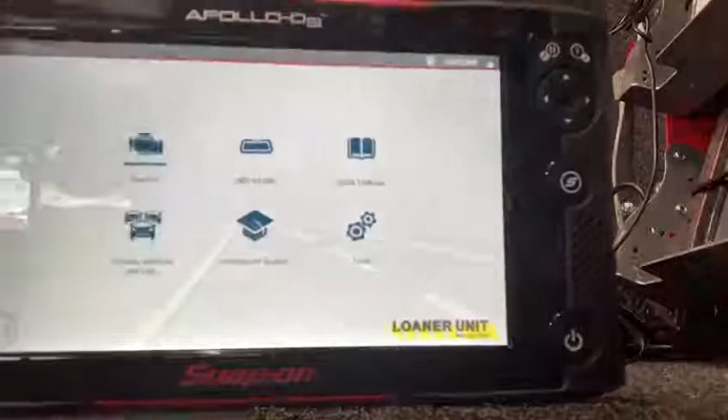So we're going to start off by powering it up. First of all, extremely quick startup time. This thing boots up quicker than you can probably open the door and find the OBD2 port.

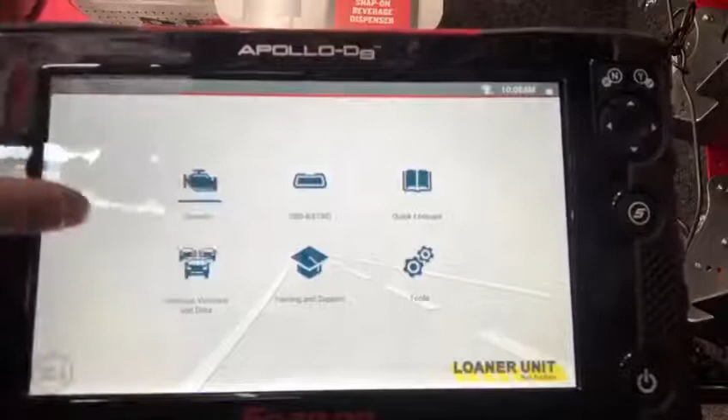So you get 6 options on this one. You have your quick lookups, your OBD2 direct - so this is basically like your generic code reader - your bidirectional scan tool over here, and then all your back end stuff. So you get your previously viewed data, previous vehicles, training and support, which is really nice.

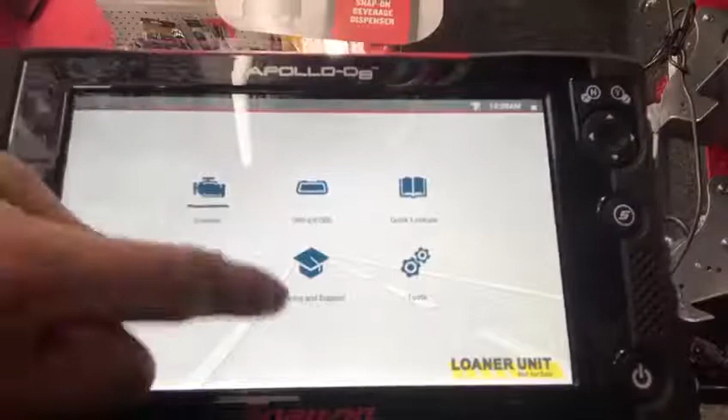There's actually videos built into this one, so if you have any issues you can refer to it. It's almost like an online training manual as is.

And then your tools. What I'm going to be going through is just your scan tool application on this, mainly because we could be here hours. But this scan tool is very...

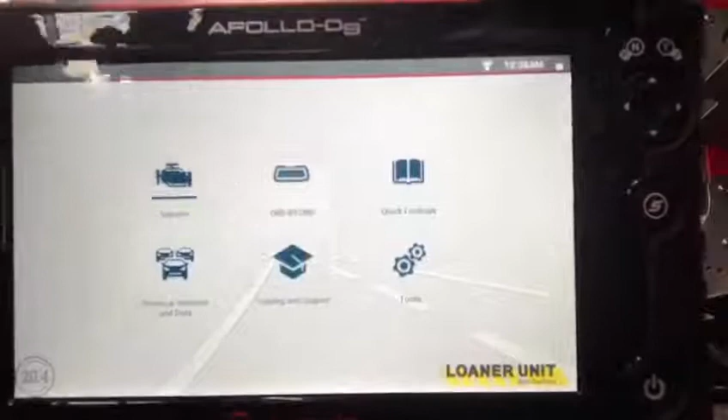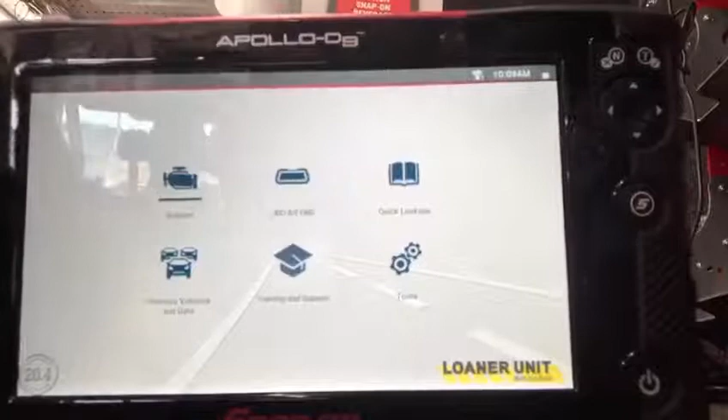I'd say unique, because not only is it a bidirectional scan tool, which means you can basically actuate almost everything on the vehicle, from turning the headlights on to putting the windows up to actuating the wipers, basically everything. But it also has something called Intelligent Diagnostics in it, which is a filtering program that only Snap-on has. It's a very unique thing, and we'll get into that right now.

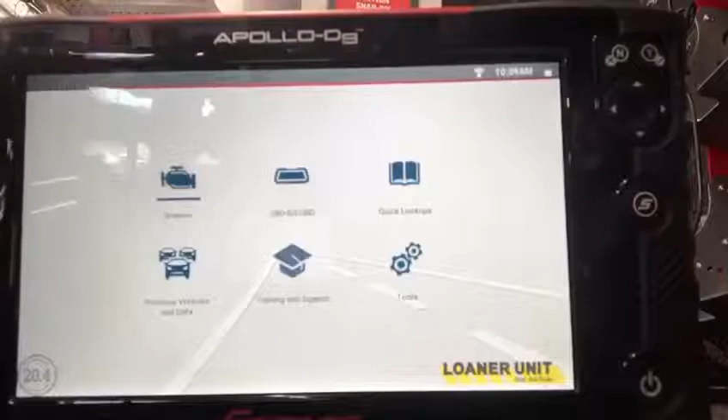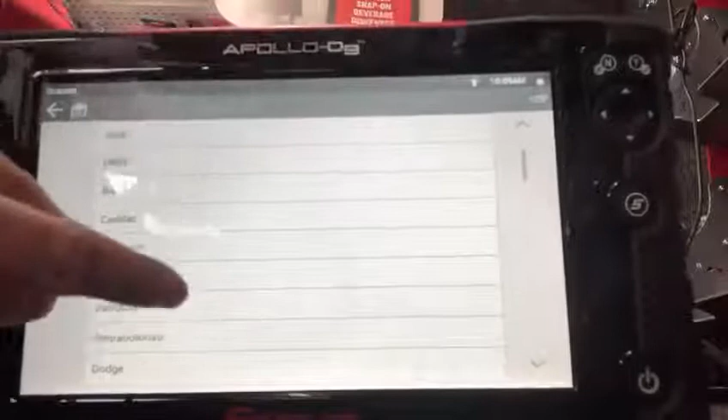So we hit scan tool. For one, you'll notice how quick it is. Now about this new screen - our old scan tools were pressure sensitive, so it couldn't tell if you were swiping or touching. The new ones, you can actually swipe with it, so you don't have to worry about using your directional pads like you would on an older scan tool, or tapping at the bottom here.

It'll basically allow you to swipe as if it's your cell phone screen. So we're going to go into demonstration here, and basically that means it's acting as if it's already hooked up to a vehicle. I'm on the truck, unfortunately my smart car wouldn't fit on the back, so we can't plug into that today. But if you do want a real world demo, let me know and I'll show up on time for you.

So I'm just going to go into a Chevy, because obviously there's a few more Chevys around than BMWs. Toyotas as well.

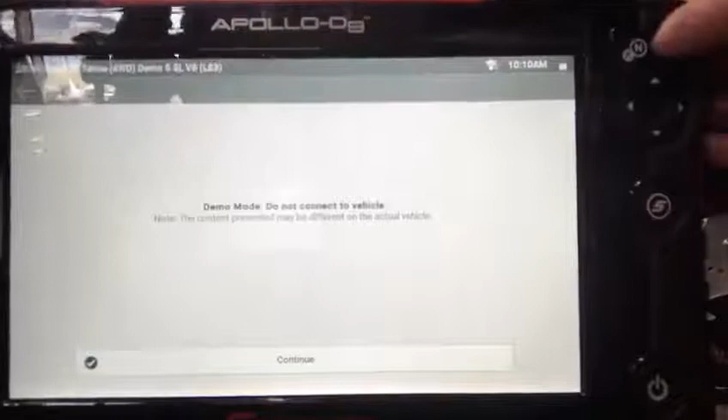So Chevy, we're going to click on there. We're going into a 2016 Tahoe. You'll notice how quick this is as well - this is real-time stuff, so it's not because it's preloaded in or anything, this is how quick it actually works. And also over here, you can just hit your yes button. So we're going to do a code scan.

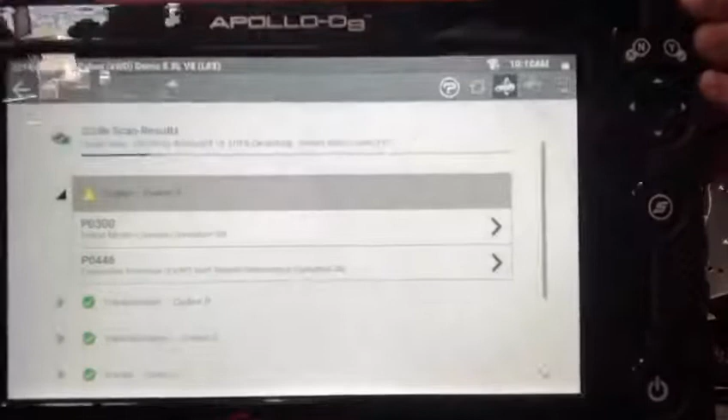We're going to start this from the bottom, so we're going to do a pre-scan as if the vehicle's just coming in. You'll see that little line cruising along there. Keep in mind I'm stalling right now, but there should be about 25 modules in this vehicle that it's actually scanning individually.

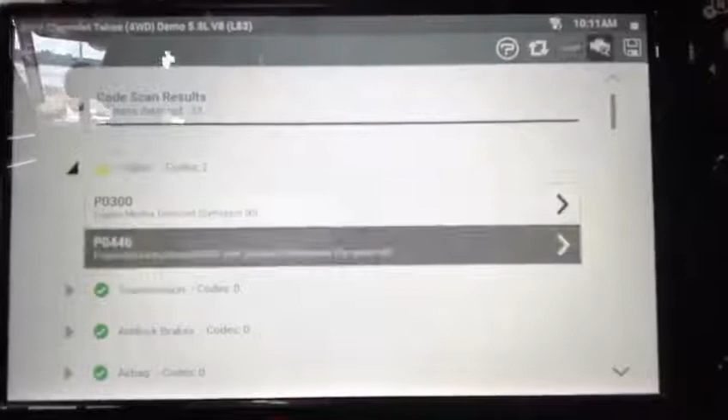And just like that, it's done. Since this is a demo, it's going to give us some information as we go. On this virtual vehicle, you have two different codes: a P0300 and a P0446. Now, if you want more information, this is where this scan tool changes.

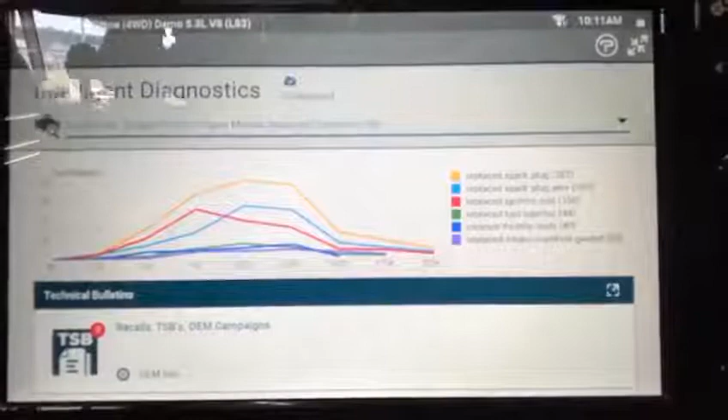So this is your Intelligent Diagnostics page. It gives you your most commonly replaced parts. Obviously you're going to probably look at your yellow line first, where it has more repairs than any other one.

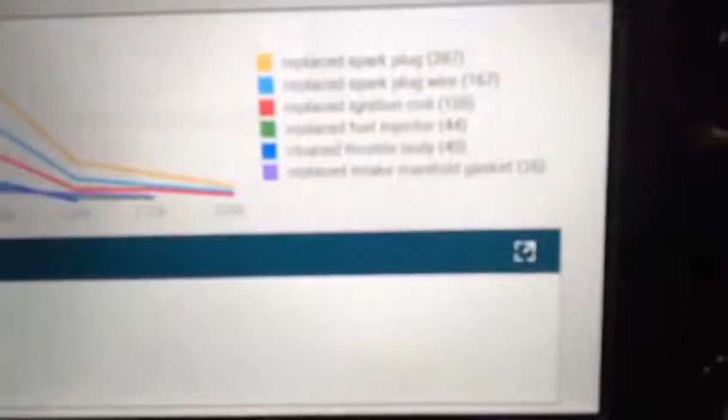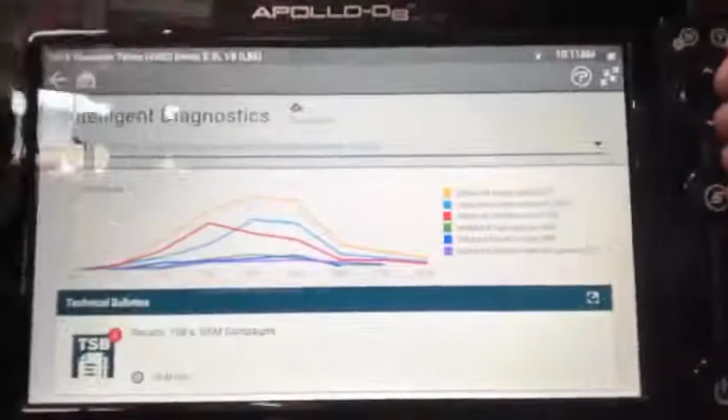If I focus in here, you'll see that says replace spark plug. Obviously on a misfire code, that's where you go first. Now, it could be coil, coil on another vehicle, it could be something completely different. Each one is specific to the vehicle, to the code, so it's not going to have a generic thing where it says on all misfire codes it's going to be the spark plug first. But it's a fairly generic issue, and usually the spark plug is that issue.

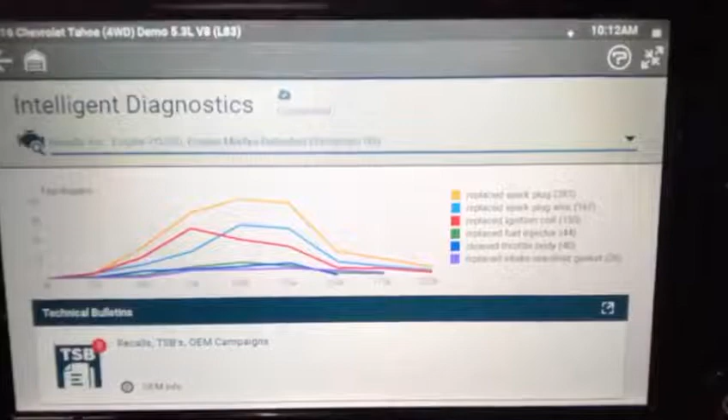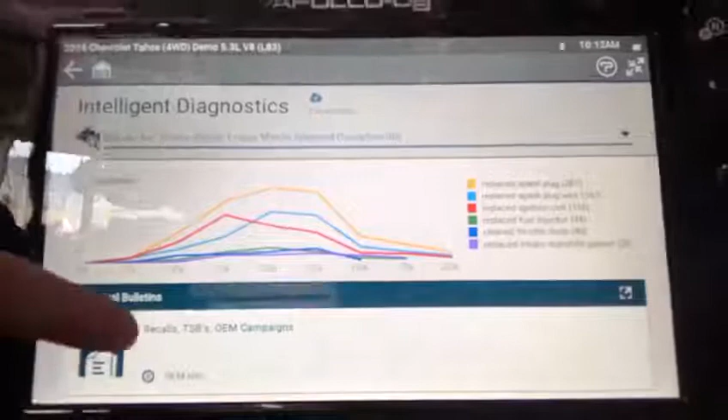Now, you probably noticed down below here, you actually have a TSB button. So this is up to date. Obviously, if you were behind on your updates, you wouldn't get the same information or at all. But fully up to date, you get any known TSBs for that vehicle on that code.

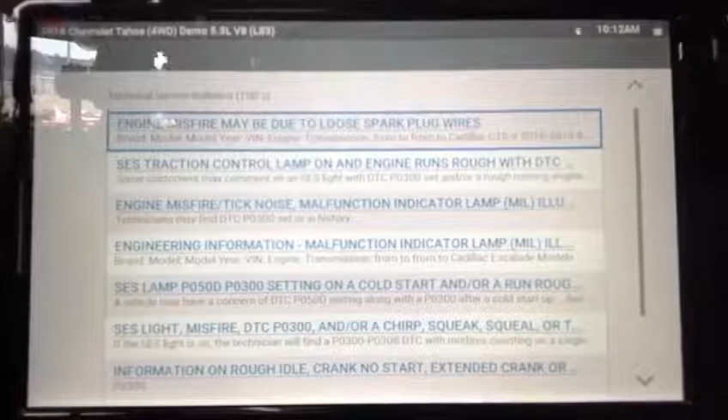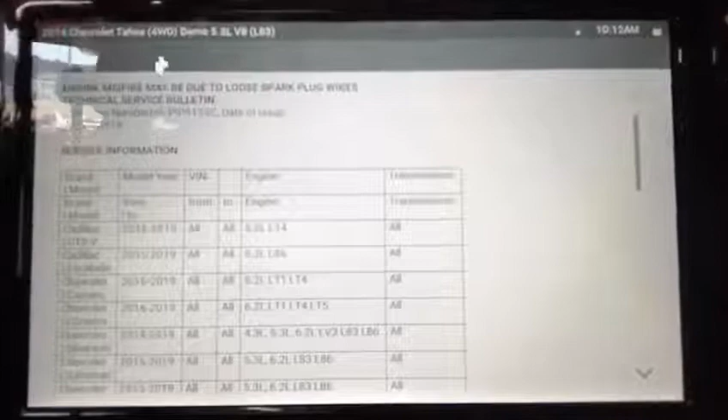So right then and there, you could stop working on the vehicle. You might be good and say, hey, this can go to the dealer. This is something that I can put on the back burner and let someone else deal with, or something that you might want to get on top of right away if parts are on back order. But to know if those parts are on back order, you're going to need to know what parts need to be replaced.

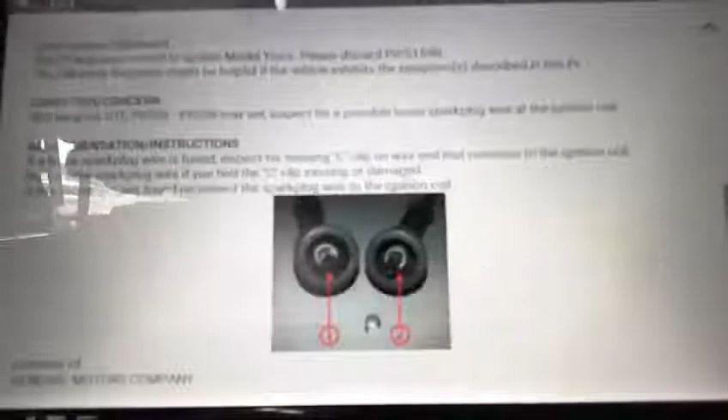And with this TSB information, we'll go down through obviously pictures, as if you're looking at a computer screen. It actually shows you everything you need. So this one's a fairly short TSB, it tells you all your makes and models that are related, so on and so forth.

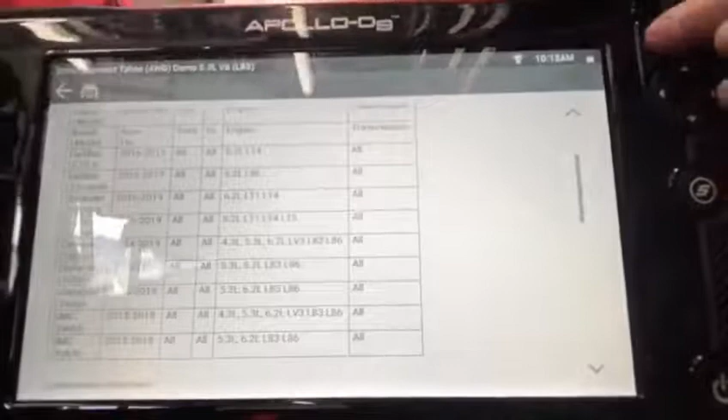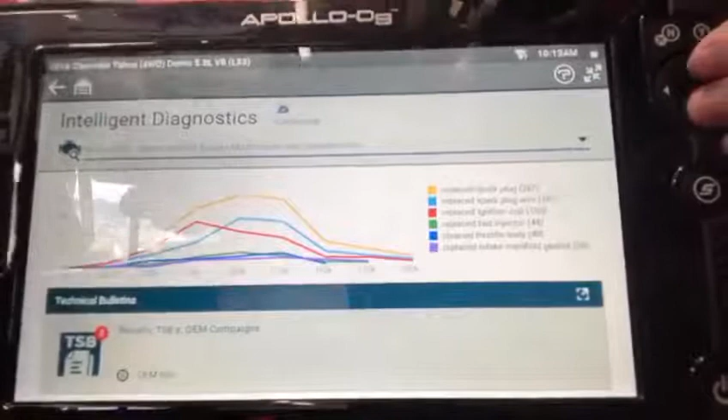Once you're done that, you can hit your home button or just your back button up here, and then you can look at any of the other TSBs that may be related to the issue you're having. We go all the way back to your landing screen, and as you notice, it was only 2 clicks. You're right back to where you started with that Intelligent Diagnostics landing screen. You'll see this a lot if you are scanning vehicles.

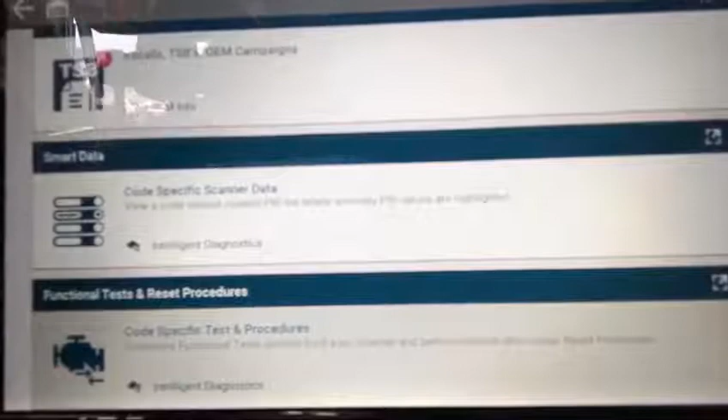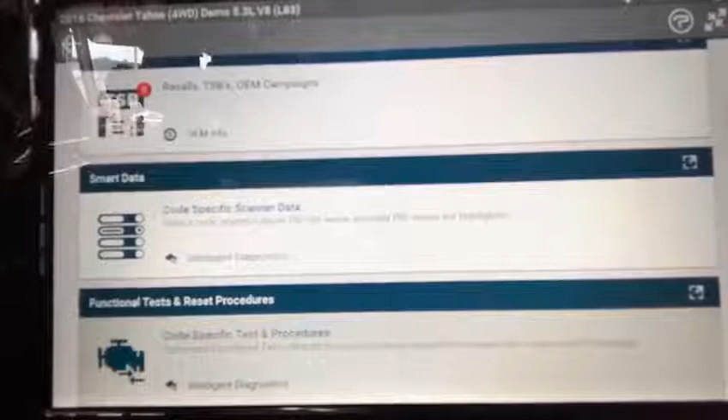Now, below that TSB, you're going to see Smart Data. My favorite part, because as you can tell by my videos, sometimes not the most professional. I have not scanned a lot of vehicles in my day, but I can tell you that this has saved a lot of people time, because on a vehicle, on a P0300 code, a lot of people know exactly what data you're going to want to look at. But if that code is more obscure, or if that code is something you think you know the answer to, but you're not sure...

So you want to check data on it, live data on the vehicle, you're going to have to go through and actually select each individual PID list or your individual data that you want to look at. This scan tool filters it for you, and not only does it filter it for you, you'll hear it in a second. It takes a second - headphone warning.

Don't worry if it is going to do it, you're going to want to turn your volume down. You'll hear the beep right there on time. So what that beep tells you is there's some data, one of these PIDs - and obviously we know which one it is - is out of manufacturer's specification. And what that means is there's an issue with the min or max values that the vehicle is outputting compared to what it should be doing and what the scan tool is reading.

So you'll see there's a little red flag telling you which problem child you have to deal with and which information you're having issue with. So obviously you see it counting up over here - that's the amount of misfires on that cylinder.

Now you could have 2 or 3 cylinders misfiring, but right now you're only having cylinder 2 misfiring. So it gives you a place to start.

Obviously, if you have one of our Snap-on scan tools, you can get into this same information, but with this one, it actually does it a lot quicker. It's already filtered for you, so you don't have to sift through hundreds of different PIDs just to get to that information. Now, let's say you want to see all that other information, you hit your no button once, and you're back to your Smart Data list that we were just in.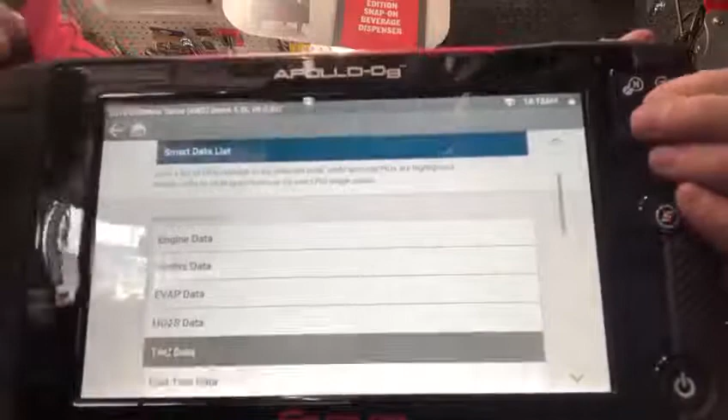But you can also go into engine data, your misfire data, or anything else that they've made custom PID lists for, or all your data at once, whatever you want to look at. We go back one more time, back to that familiar page.

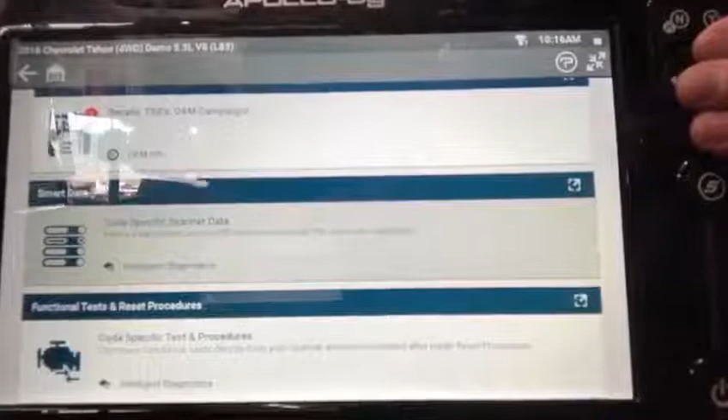Last thing, I promise you, I won't keep you here all day. I've already spent 10 minutes of your time. Hopefully it's been worth it so far.

But last but not least, your functional tests and reset procedures. This last thing, I'm going to show you my face on this one because I want you to know I'm being truthful. I don't want you guys to buy these scan tools as a code reader. These things do so much more, and like I was saying before about bidirectional controls, these things will do so much more than just read and clear codes. This is where you'll actually be able to see that. This is where the rubber meets the road. So we're talking about that misfire code.

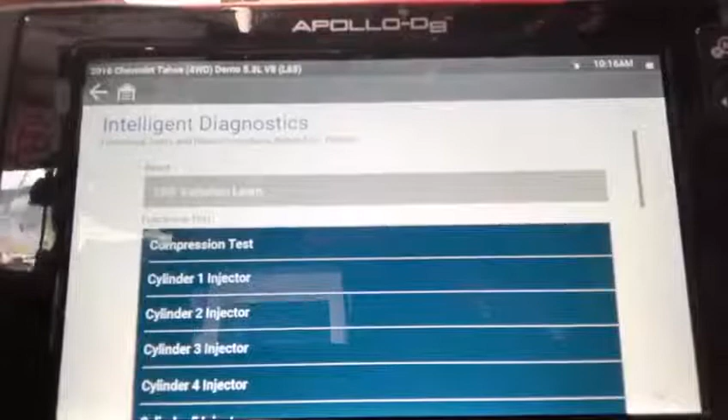You want to know what functional tests and reset procedures you can actually do to diagnose that vehicle further. On every other scan tool, you'd have to go back to your engine menu and pick whichever functional test you wanted. It's just generic. It doesn't lead you in any direction, it doesn't tell you what the recommended tests would be. This one does.

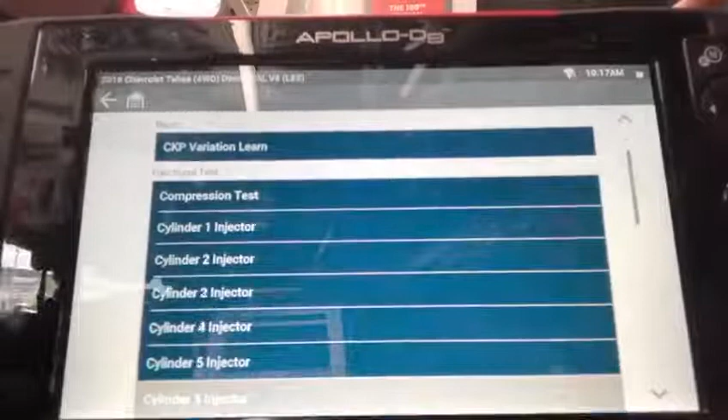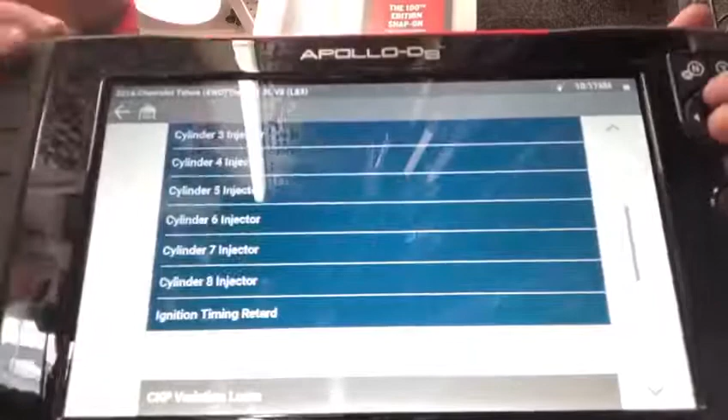So you'll notice you've got your different compression tests and then your injector actuations, I guess we'll call it. What you're actually doing is shutting down your injector to make sure the injector isn't the issue, or making sure that it is the issue, along with your ignition timing test as well. They're all in there. And of course, any other tests you might want to do, but they're not related, or at least not known to be related to that code that you have.

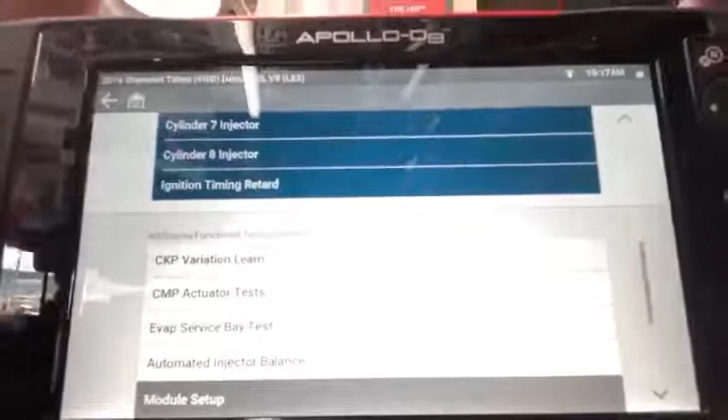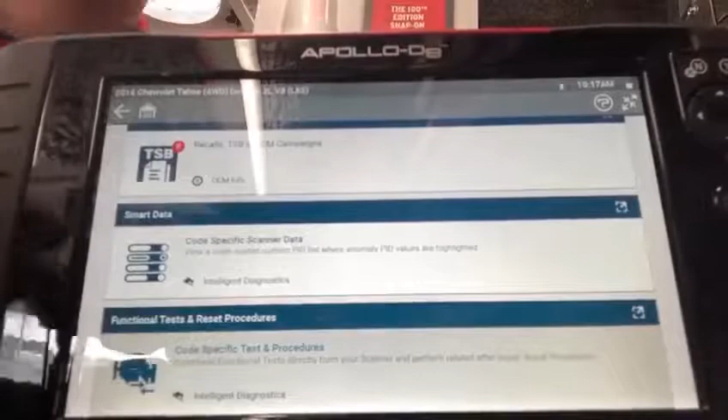So it's a filtering process that saves you a lot of time. It helps you find things that otherwise you might not know are in the scan tool. And of course, the best thing is if you have a vehicle you've never dealt with before, you can actually diagnose it as if you've worked on it 100 times before, because these tools have worked on it and keep that data inside of it.

Last thing, it also gives you your SureTrack data, most commonly replaced parts, causes, corrections, and complaints. So if you have a complaint that doesn't have a code, something along those lines, you might be able to get some information out of it that way as well.

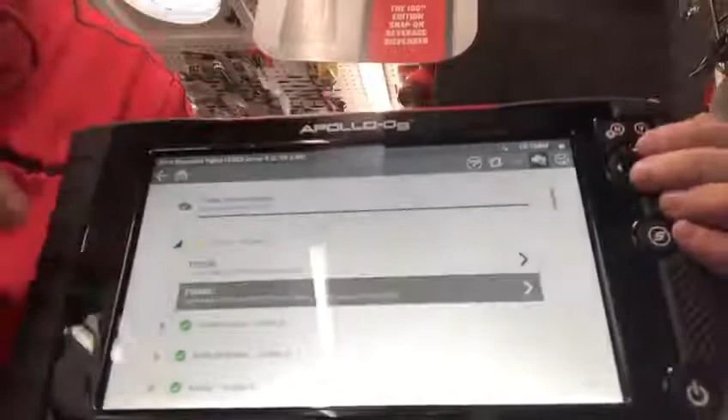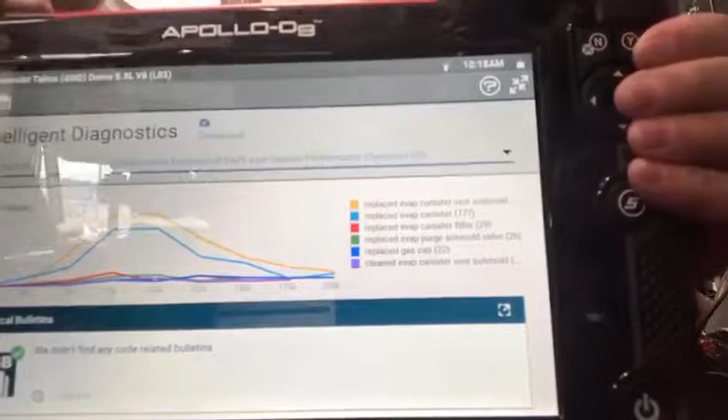Going back one page further, you can go into your other code and take a look at that as well. So it loads every code separately with all the data separate. You'll notice the most commonly replaced part on this one is the EVAP canister vent solenoid. It might be something different on, say, a 2007 or 2008, but out of about 70 repairs, that was the most commonly replaced on this one.

So hopefully that sheds some light on probably our most sold scan tool of the year. And I'm saying that before we've even sold any, just because of how handy this thing is. Hopefully this gives you a little bit of information.